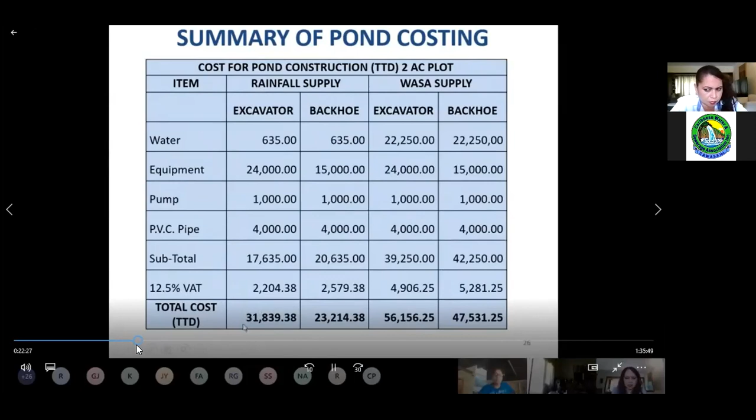So the $31,000 is the figure we are most interested in for pond incentives, because this is where you are using a rain-fed source and an excavator. That's the total for a pond on a 2-acre plot.

Equipment costs now, these are just rates if the farmer has to be renting equipment. We look at approximate rates per hour or per day. We have it per hour for the excavator, for a backhoe loader, and a roller compactor, because the compactor is necessary for the embankment, compacting the embankment, the side slopes, and the base of the pond. We also have a cost for a crane, a crawler tractor, a dump truck, and a road grader.

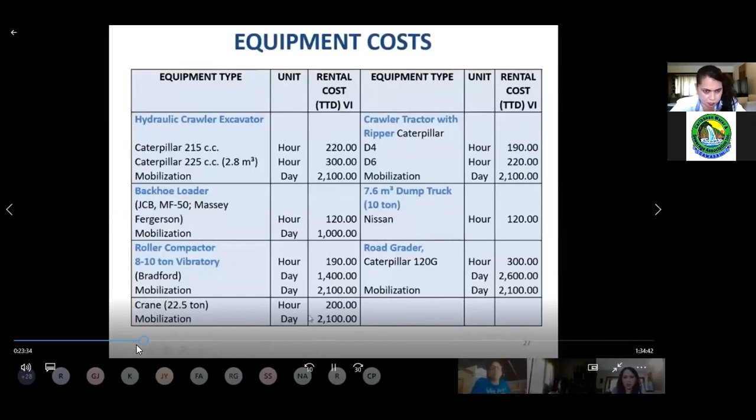So for each of these equipment costs, there's a mobilization cost, which takes up a high figure of 2,000 for the excavator. $2,100 is the mobilization cost per day. These are the figures you look at when estimating rates for rental of equipment.

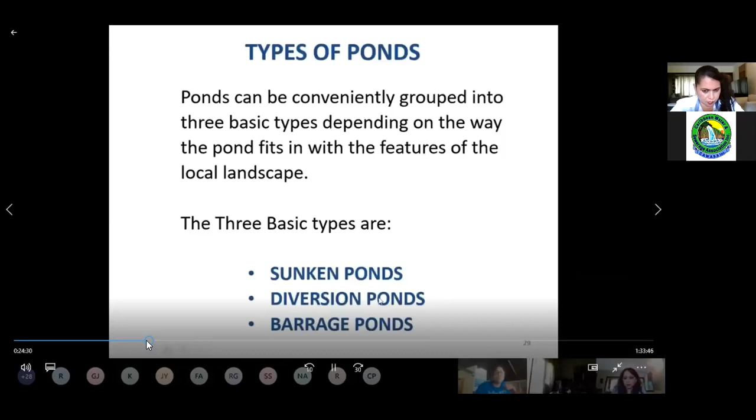Now we reach Module 4, design criteria for ponds for drainage and irrigation. We look at the types of ponds before we look into the criteria for design. There are three basic types of ponds: sunken, diversion, and barrage ponds. We don't really consider barrage ponds in Trinidad because it's not feasible for the agriculture sector. So we'd be looking basically at the diversion pond first, this is what is used in Trinidad, and in some cases sunken ponds, because sunken ponds are where you have them in valleys and so on. So we look at the other two, diversion and sunken ponds.

The factors to consider for locating ponds: the main factors are the topography and the proximity to the water source. When I say topography, it means whether the land is flat or undulating, and it's highly recommended that ponds be dug on flat lands preferably. But we allow slopes of at least 0.5% grade to 3% grade. For instance, grade meaning the vertical to horizontal ratio would be like 1 to 2, so 1 vertical, 2 horizontal. These are the recommended grades if a flat surface isn't available.

Proximity to water source, it should be close enough to rivers and channels, but there is a limit, because ponds should not be built too close to river embankments. I'll give you those quantities later on, the limits that must not be exceeded for proximity to other channels. The soil type is another factor to consider; we have particular soil types needed for pond construction.

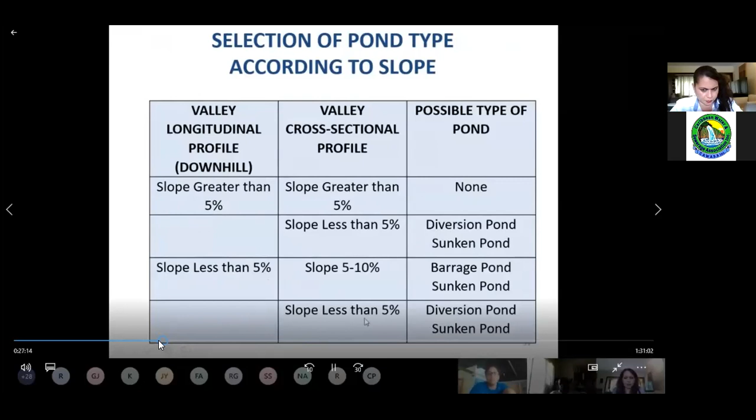These are definitions of what the sunken pond is. They are usually at levels below the level of the surrounding land. So as I said, it is found in valleys and so on. And they are directly fed by groundwater, rainfall, or surface runoff.

It is built either as a dugout pond because it is in an existing hollow, so it already exists in a hollow. It just has to be excavated and dug out to increase the dimensions of the pond in this case.

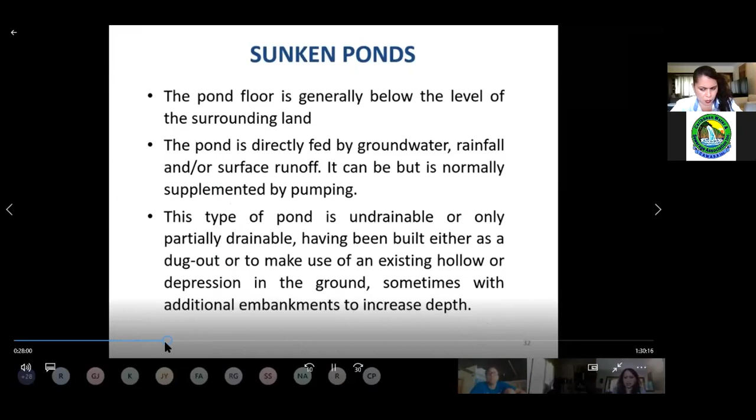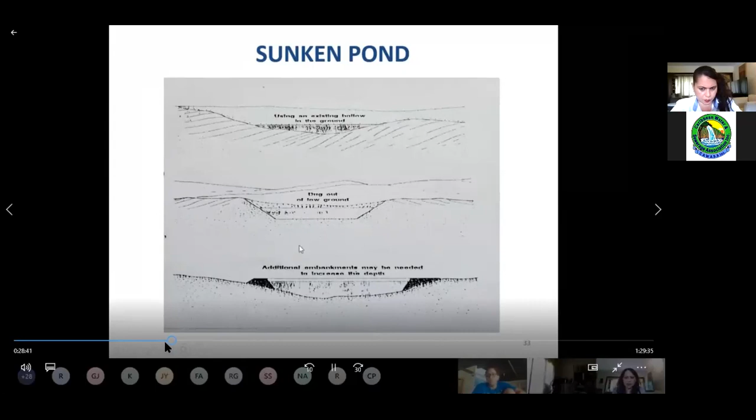So this is a type of pond built for irrigation purposes. The diversion pond is what we recommend basically for flat land. This pond is fed indirectly by gravity or by pumping through a diversion canal, so it could be fed from spring water, underground water, or river channels.

And it is done on flat ground, where you have to build 4 embankments so that there will be no overflow when the pond is full. The embankment will also protect the pond if there is flooding in the area, so it is a double purpose: it protects the water from flooding, and it protects against overflow of water from the pond onto the land.

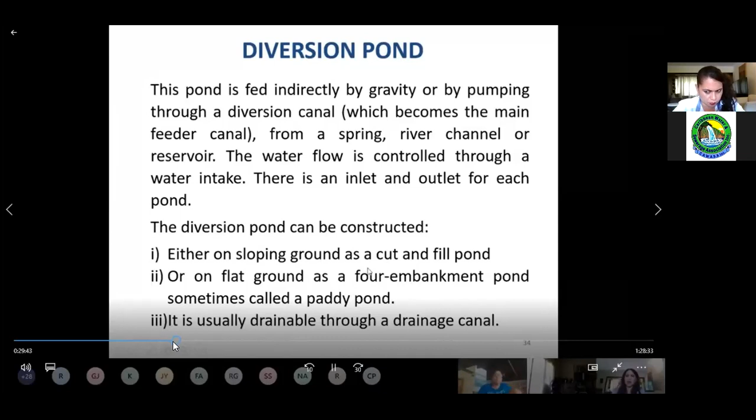It is also fed by a pump, where the pump might be used to lift water from another water source, by a nearby river, and the pump lifts the water and uses it to fill the pond in this case.

These are advantages and disadvantages of the diversion and sunken pond. We look at basically differences in cost, the way the ponds are shaped, and so on. There's no need for embankments with the sunken pond because it is already in a depression, so this is an advantage; you don't need to build up the embankments as often as you would have for a diversion pond. These are the basic advantages and disadvantages of the 2 types of pond I just described.

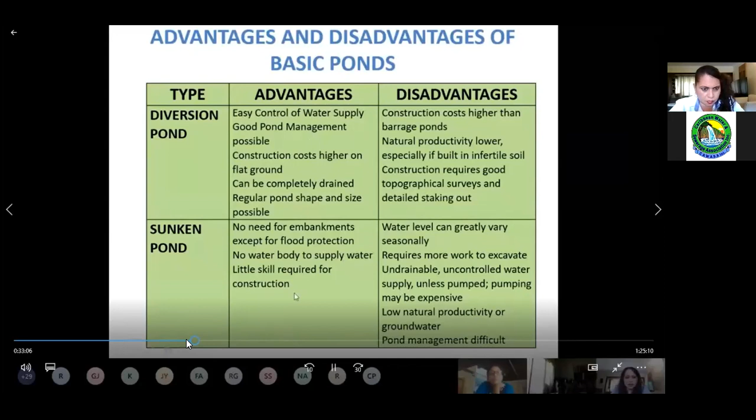Module 5 now, the criteria for pond site selection. I spoke a bit about the pond site being near to the source of water, away from roadsides, and not too near to river channels or utilities. So pond sites must be selected for the most efficient and economic operation on farms with the following criteria: maximum surface runoff to be captured for storage without significant collection of silt and debris.

So we consider surface runoff, then minimum operational costs needed in pumping. The operational costs using pumps, we try not to have pumps as that will increase the cost for filling the pond with water. So we recommend preferably rain-fed ponds, but if it is necessary, we use pumps to get access to water from rivers and so on. Minimal costs are needed also in earthworks required.

So the less amount of earthworks required, you get less capital costs, with a minimum amount of drainage channels needed within the plot. You try to locate the pond near to where the crop is being cultivated, so you don't have as many lengths of pipes for irrigation purposes. You would have less amount of pipes needed for irrigation if the pond is located near to the crop being cultivated.

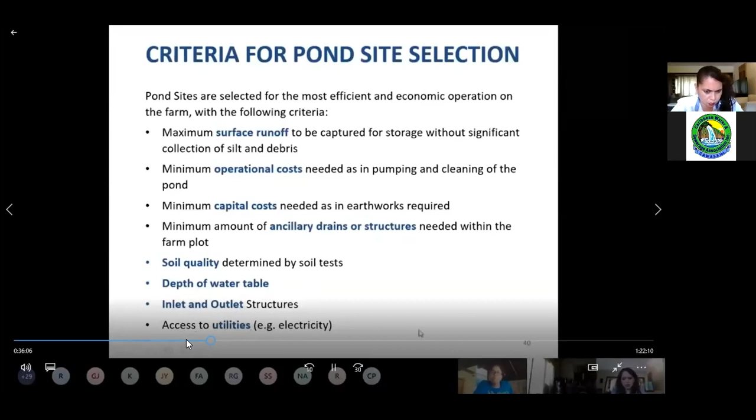Inlet and outlet structures, I described about that a little earlier. And access to utilities, I also described that earlier. We have infrastructure systems for this site.

As I spoke about the pumps and so on, you'll have a pumping system, as seen in the picture, that will fill the pond. And there are various capacities of pumps.

There are farm reservoirs or communal storage ponds. These could be located on sites in close vicinity of the projects, so you'll have multiple stakeholders getting access to the water from a communal storage pond. This is another type of pond where it's not for the individual farmer, it is used collectively by farmers. In those cases, farmers can do joint abstraction of license for water, and there are many locations in Trinidad where farmers do this type of water storage by communal ponds.

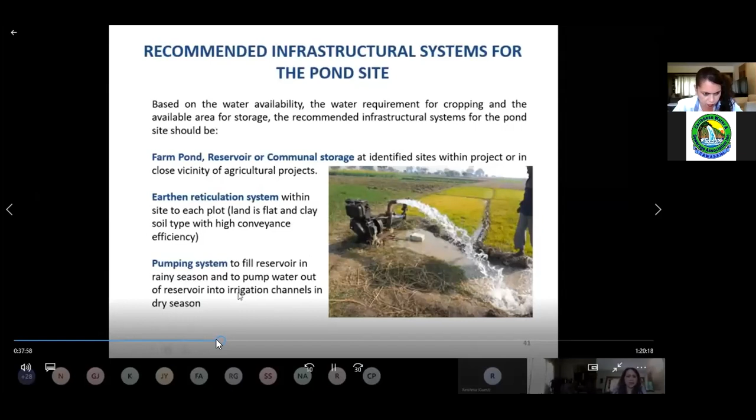Earthen reticulation system within the site, where the land is flat, clay soil type, with high conveyance efficiency. This is the earthen pond as I described, the basic diversion pond, and it is an earthen pond. Some people line the ponds, but we mostly just do earthen ponds in Trinidad, because the clay content is sufficient - at least 20% clay content is what we recommend for the earthen type of pond. These are just a few.

Six, we have criteria now for design and associated pond structures. So we have efficient water control and distribution from the pond storage structure.

So design of the pond for irrigation involves the design and assessment of the following: water availability, irrigation water requirement - this is a vital aspect of the calculation of the pond design - the irrigation water requirement, which is based on cropping pattern and irrigation method.

The design intake and conveyance canal, whether it's a pipe system or via canals which have been constructed on the surface.

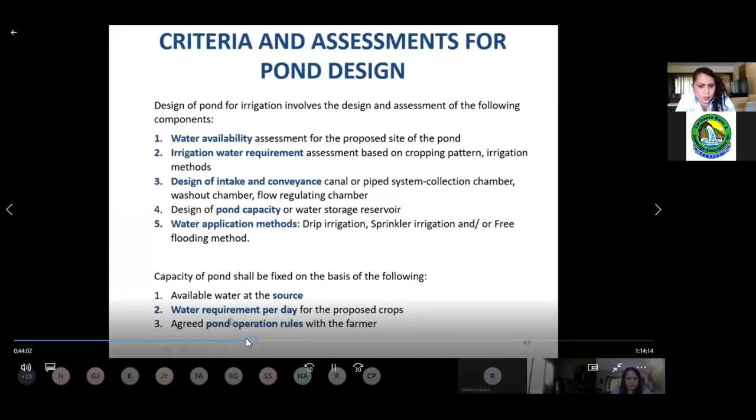Then the design of pond capacity of the water storage reservoir, that is a criteria for the design of the pond - you need to determine the capacity that is required to hold. The application methods, such as drip irrigation, sprinkler, and the surface water or free flooding method. Capacity of the pond shall be fixed on the basis of the source, water requirement, and pond operation rules. This is just summarizing what is said above.

Recommendations for embankment construction: mostly the soil type is what is important. The height of the embankment refers to the height after settlement and compaction by a bulldozer, and whether it should be used for vehicular traffic, because sometimes if the top of the embankment is wide enough, there's use for vehicular access where it is a wide embankment.

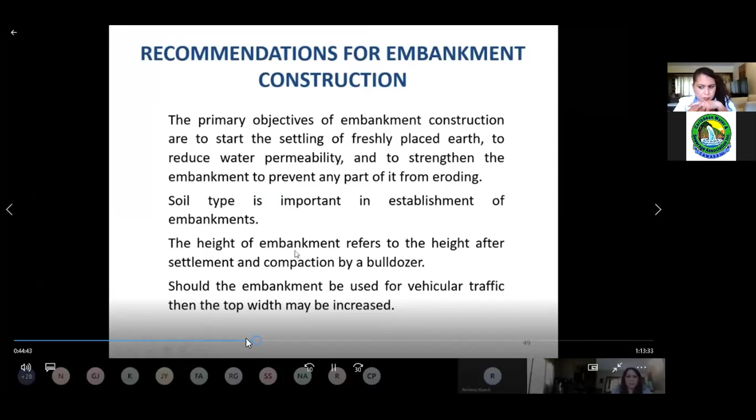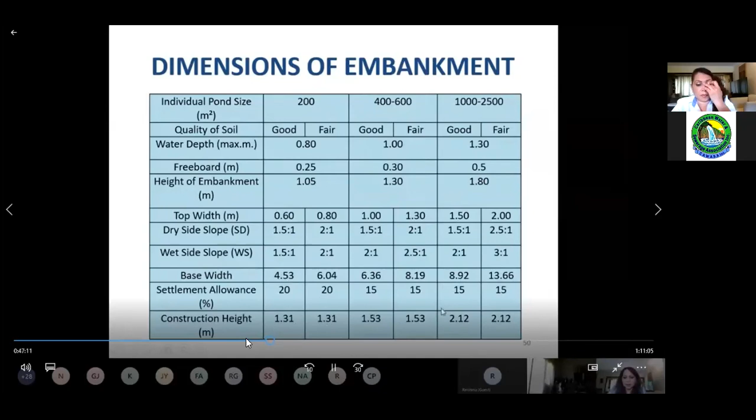The side slopes: steeper slopes are more easily eroded, so slopes should be more gentle for soils that contain more sand. As the slopes increase, erosion increases, and as the size of the pond increases, there are more waves in the water due to wind. So as the pond size is larger, waves can cause erosion of the embankment slopes.

A higher slope ratio makes it easier to use bulldozers because it is less steep. As I said, 3 to 1 means shallow, since it's 3 horizontal to 1 vertical, so the embankment is shallow and you get a more shallow pond. This gives easier access to the base of the pond for bulldozers building the embankment. The shallower the pond, the more you can use a bulldozer; the steeper the pond, the more you need an excavator for longer reach.

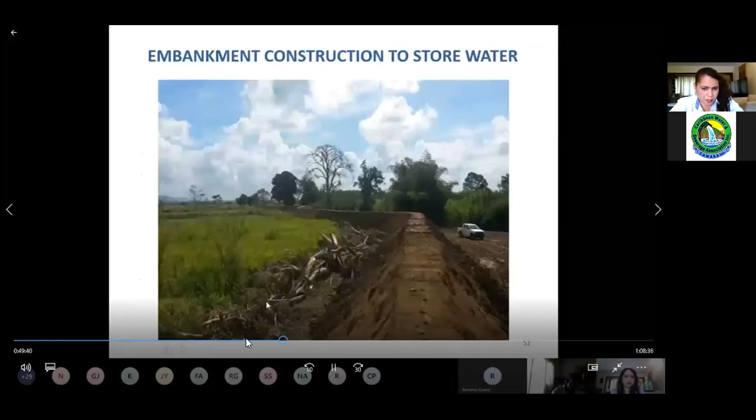For pond inlet structures, we usually recommend a PVC pipe 10 centimeters in diameter, or up to 12 centimeters, even up to a foot in diameter. Inlets can also be made using shallow trenches. Another option is an inlet via a sluice gate, but we will not consider that in this training, since sluice gates are used for very large communal ponds.

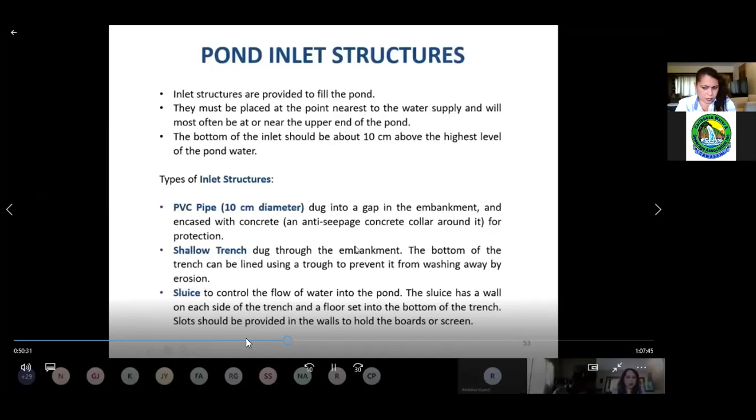For overflow pipe construction, we try to locate the overflow pipe at the corner of the pond, where it exits into a channel built at the side, an intermediate channel connecting to an outlet source like a river. This overflow pipe, sometimes called a spillway, is built through the embankment, positioned about 15 to 20 centimeters below the highest water level in the pond.

As shown in this second diagram, the end of the outflow pipe is 15 to 20 centimeters below the surface level of the pond. It must be tilted at that angle so that when the pond overflows, the water passes through the pipe and exits at the outer embankment, where gravel, stones, or boulders are placed to prevent erosion.

Boulders are placed so that when water exits the pipe it does not erode the embankment, filling a small catchment that leads into another channel to the river or outlet source. The pipe is fixed in the upper part of the embankment as shown, and it must be long enough that the overflowing end discharges excess water beyond the toe, the base, of the embankment.

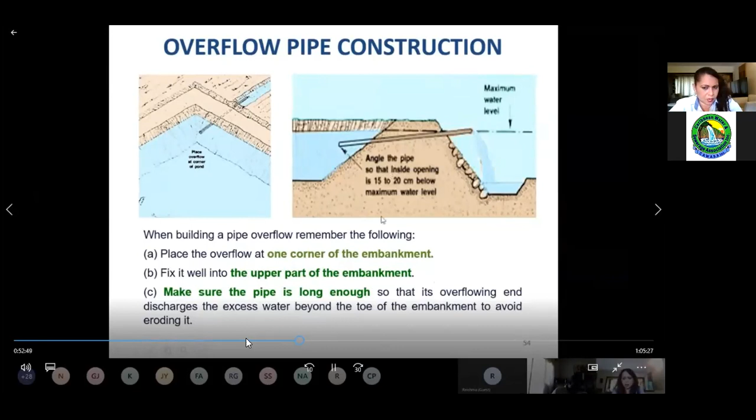The overflow pipe is usually 12 inches in diameter. It can be secured with cement casing, as shown in this diagram, where concrete is poured around the pipe, forming a concrete bracket that prevents the pipe from shifting within the embankment.

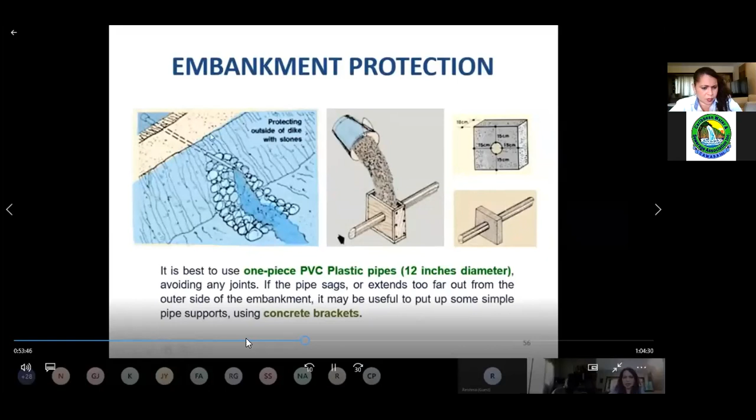This casing is built prior to constructing the embankment. You build it and have it in place, then afterwards fill the embankment in layers and compact it.

So the pipe would be angled slightly, and the protected concrete area is built around the pipe to secure the movement of the pipe.

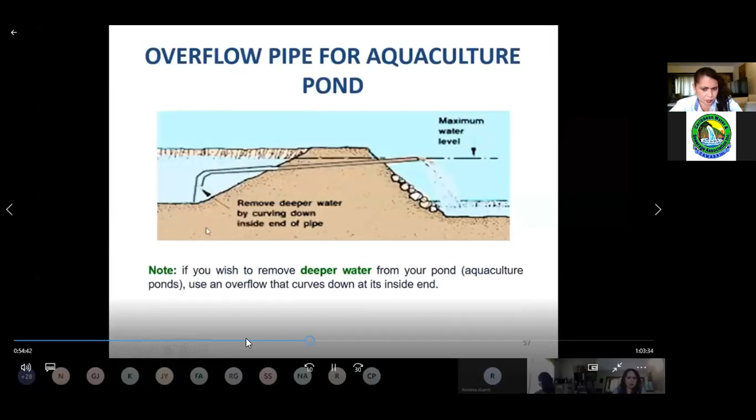This is another outlet pipe which is bent, curving down on the inside. We use this type where it's bent downwards in aquaculture ponds where fish are stored, in order to prevent fish from going into the pipe. It's usually blocked at the end with a screen to prevent fish from entering. This is only in the case of aquaculture ponds where fish are stored.

These are the sizes of outlet pipes. We have for various pond sizes, from less than 100 square meters right up to more than 5,000 square meters, various pipe diameters that are recommended. These are important figures to note when constructing the outlets for the ponds.

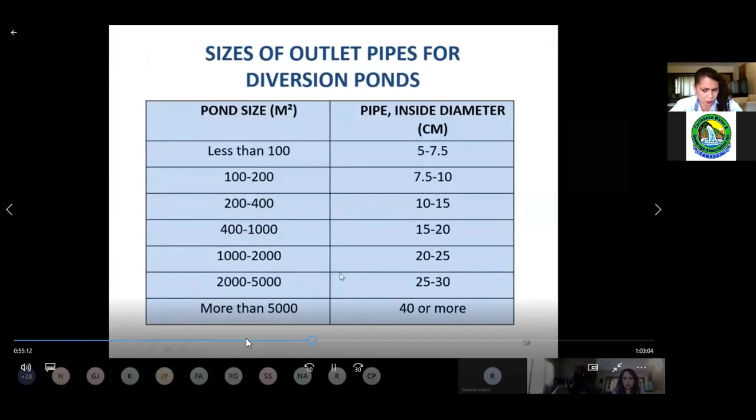The discharge capacity of the overflow pipes, we also take into consideration. For various diameter pipes, there's a discharge capacity. This is important because when the Water Resource Agency has to inspect the pond to recommend a water abstraction license, they need to determine the water discharge capacity. In many cases, the discharge capacity for certain ponds may be 1,000 meters cube per hour.

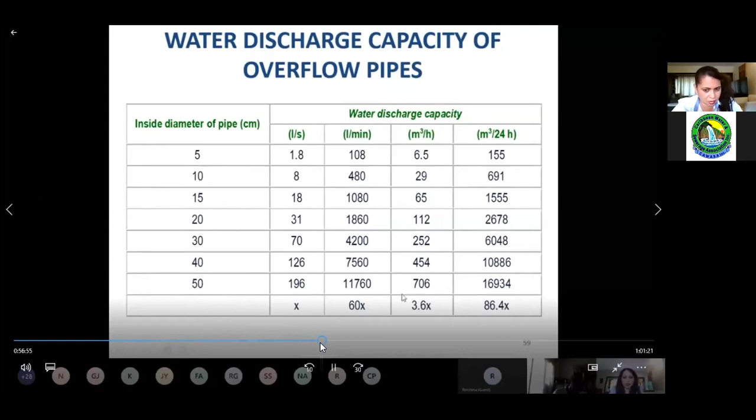Module 7, we look at the theory behind the construction of the pond now, how we calculate it.

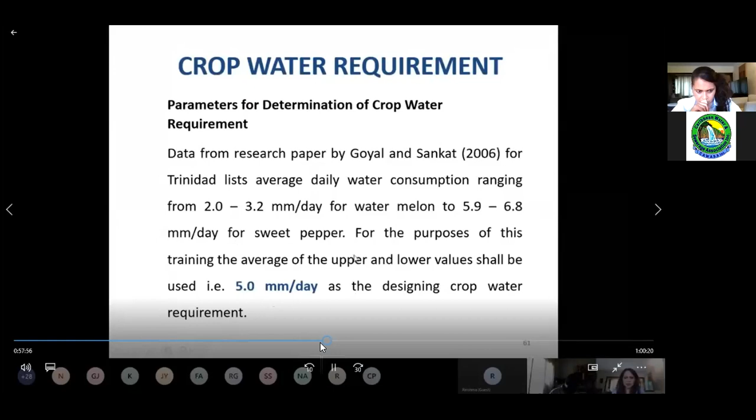We start off with the crop water requirement. This is the main aspect of pond construction, where we use an average daily water consumption of 2 to 3 millimeters per day for some crops such as watermelon, and for other crops like sweet pepper, we use 5.9 to 6.8 millimeters per day. In this design calculation, I will be giving you the average figure of the daily water consumption, which we will use as 5 millimeters per day. So the crop water requirement design amount is 5 millimeters in this case, which I'll be showing you now.

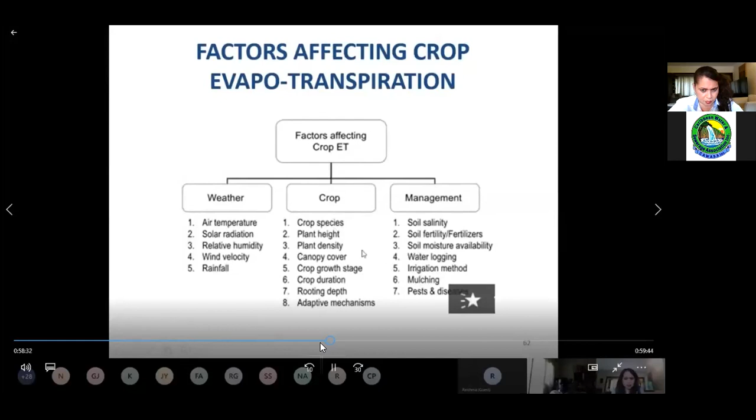The crop water requirement is dependent on these factors affecting evapotranspiration in crops: weather, crops, and management. These are just some meteorological and climate associated aspects of the crop water requirement which we look into, and all these affect crop water requirements. Major factors influencing crop water requirement or crop needs for irrigation are sunshine, humidity, temperature, wind speed, type of crop, growth stage, and soil type.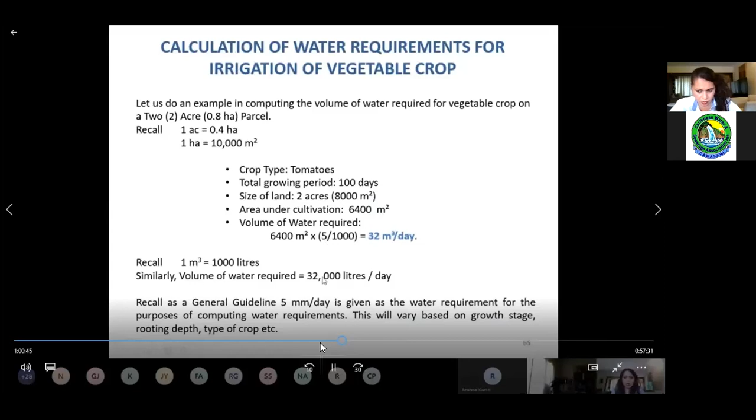The volume of water would be calculated as 6,400 times 0.005 or 5 over 1,000, which will give 32 meter cubes per day. This is how the initial water requirement is calculated.

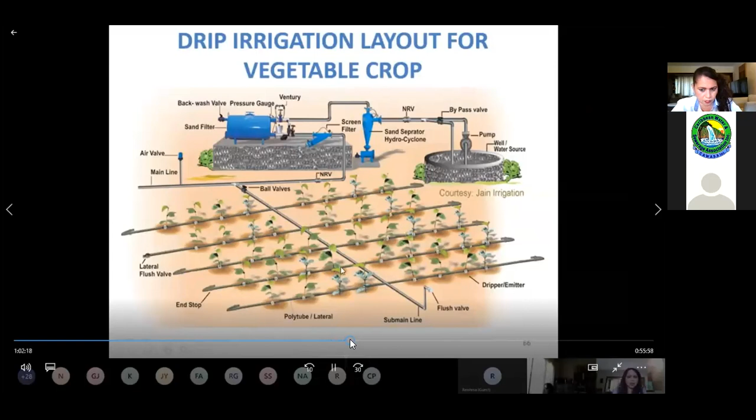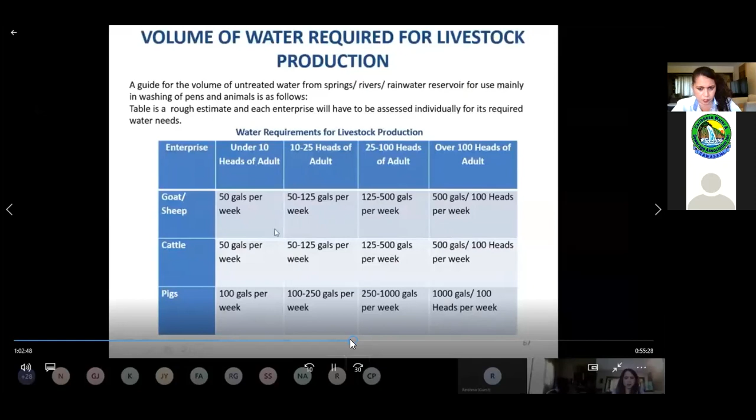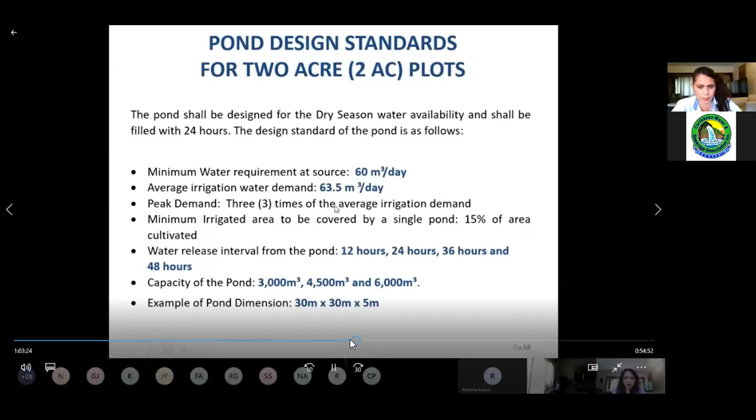The 63.5, given as the irrigation requirement per day, we start with the crop water requirement of 5 millimeters per day, and we know the effective area to be irrigated is 80% of the acreage of the land. So this is where I calculated 85% of the 0.8 hectares, and that came up to 6,475.

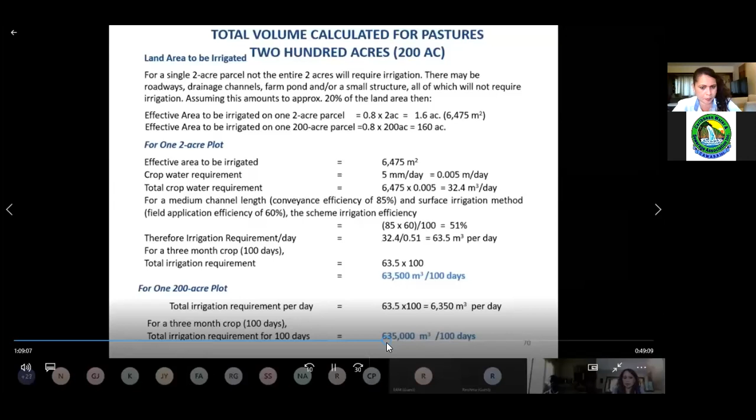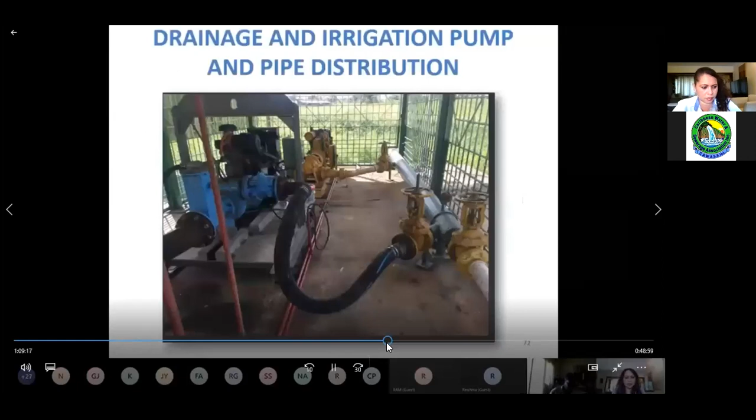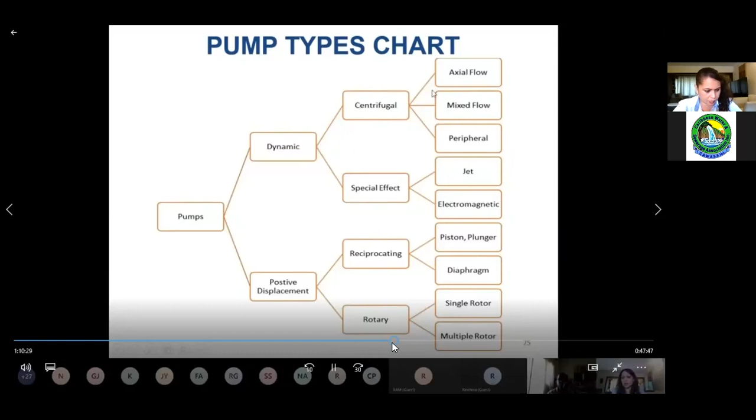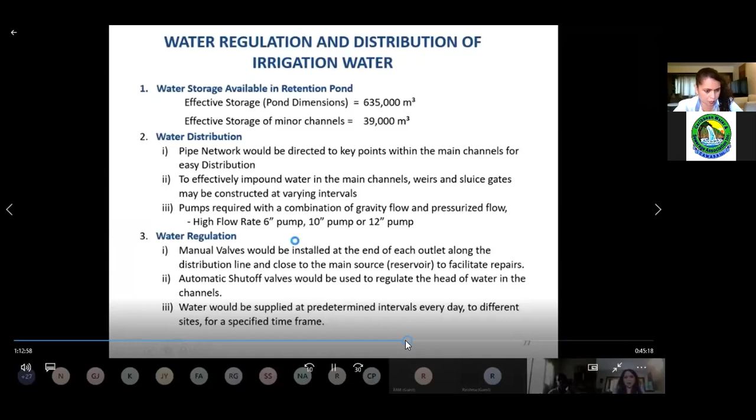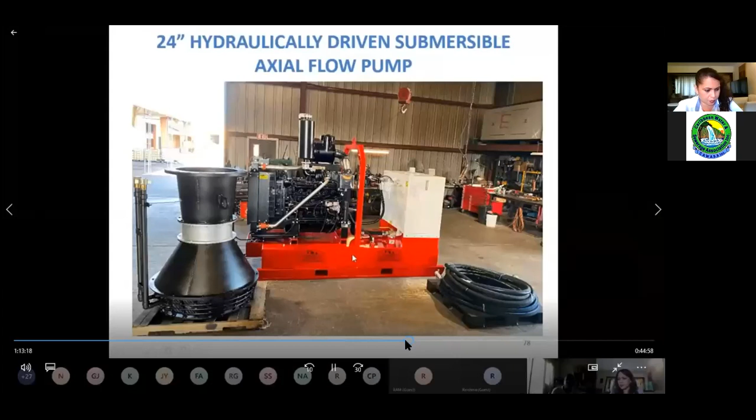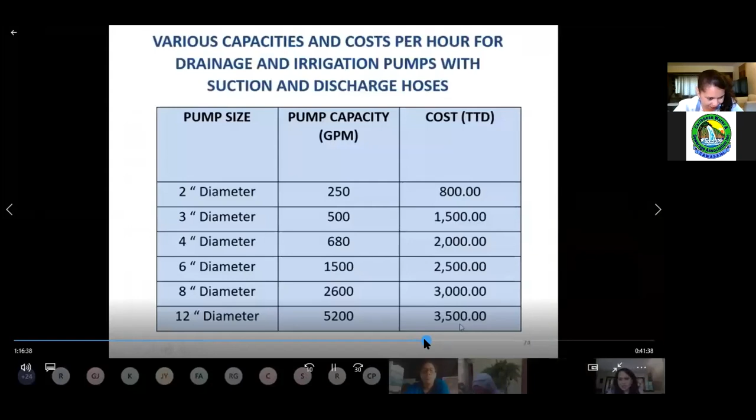Procedures. So this is the practical aspect of pond construction, how the ponds are built.

I saw some questions in the chat box about the material used for the embankment. Mr. Chedi asked about the embankment. I explained the material is in situ material, right, in one of the modules.

On design construction procedure, right? So we have 5 basic steps. First, remove the vegetative surface. Second, we demarcate by wooden pickets. Thirdly, you mark and cut the depth of the pickets so the operator can be guided accordingly, marking the depth to which it must be excavated.

Excavate material to the depth by placing material around the perimeter to form an embankment. And you compact the embankment in layers of 150 millimeters thickness - those are the heights of each layer. You use a plate compactor to compact the side slopes, and excavator tracks are used for compacting the soil at the bed level and embankments.

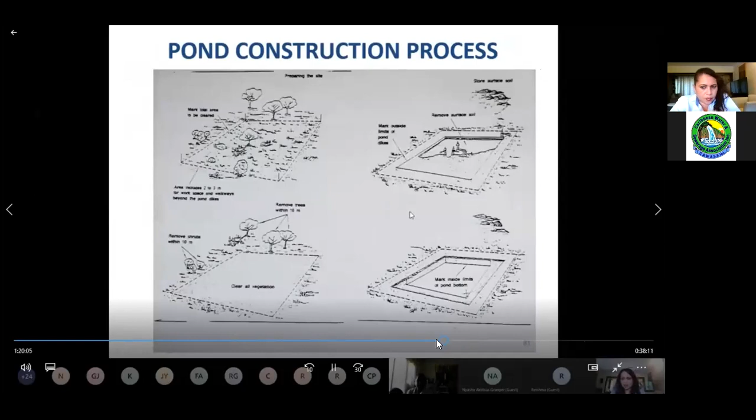These are the pond construction process stages. You have the first one with the vegetation covering the land. Then you strip the vegetation in the second one. Then the third one, you start the excavation at various stages - this is just one of the stages of excavation. And the final one, you have the completely formed pond.

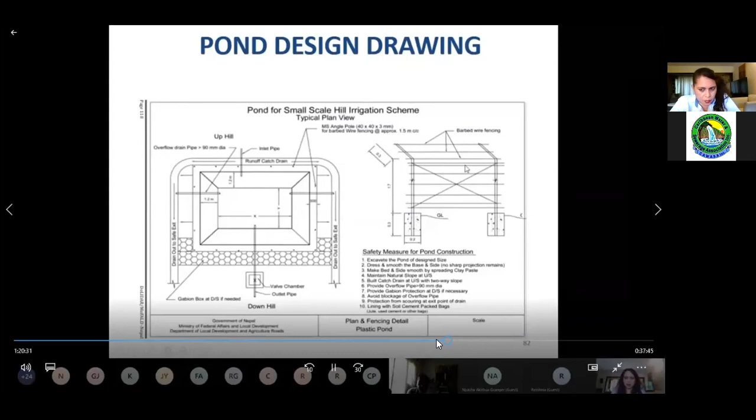This is just a design drawing of a top view of a pond that is constructed. We also have a diagram here of the fencing, which is recommended for protecting the perimeter of the pond so that no animals or any human may enter that area, because it's a health and safety provision.

This is the process of pond construction. The process for new farm ponds - they must be constructed in accordance with specs, drawings, and dimensions on bills of quantities given by the engineer or the contractor, if it is the case of a private pond where the contractor builds the pond for the farmer.

The critical dimensions are the proposed pond dimension, depth, side slopes, and spillway width or overflow diameter. The construction of the ponds are fixed price lump bid items, and the ponds are sited based on maximization of water collection from surface runoff so as to satisfy irrigation demands and minimize operational costs via pumping and cleaning of the ponds and interceptor channels directing water to the pond. The engineer must approve each pond in terms of siting, layout, and applicable design prior to commencement of construction.

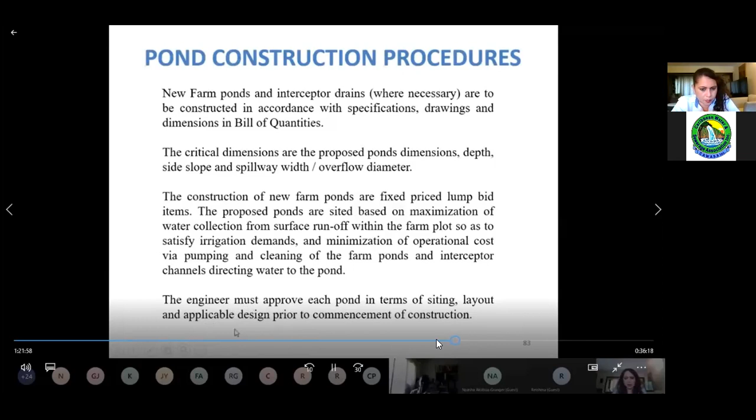So in this case, we will have the officers from the county offices. They will be able to go and inspect these sites and determine the best layout and design prior to commencement, after the training.

These are actual photos taken of the steps in pond construction. The first step is pond siting and land clearing. This is the first picture, where you have vegetation covering the site. The excavator will then come in and remove the vegetation.

This is an excavator in the background, and this is one of the operators. This is the cleared site, where you'd see the raw soil material, the subgrade - this is the raw earthen soil here.

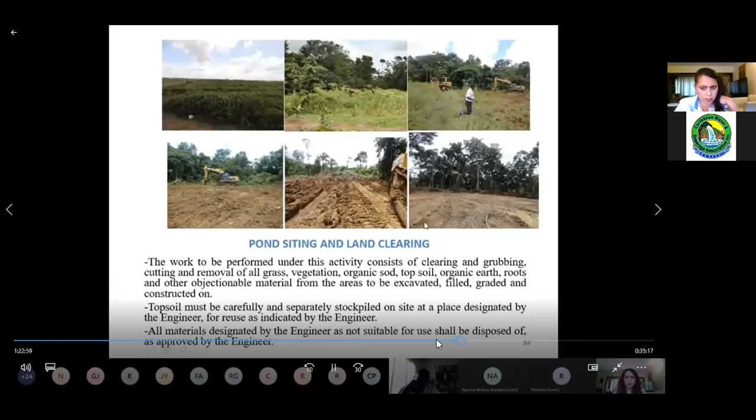So this is how it looks after site clearing. Then you have these stakes staking out the perimeter. You have the site officers here working out the area for the pond, the best location. It must be on flat land, not too near to the roadway or to channels. They locate the best location, and then they start staking out with stakes - these are the stakes here at the end, in the last picture.

Following that, the excavator comes and digs the trench around the perimeter of the pond. The excavator then removes all the soil from within that perimeter until it looks like this.

That same in situ material will then be used for constructing the embankment on the perimeter. The side slopes are dug according to specs, and the base of the pond must also be excavated to the required depth and compacted, so there will be less seepage of water. You get less infiltration when the soil is properly compacted, and less erosion on the slopes when they are properly compacted.

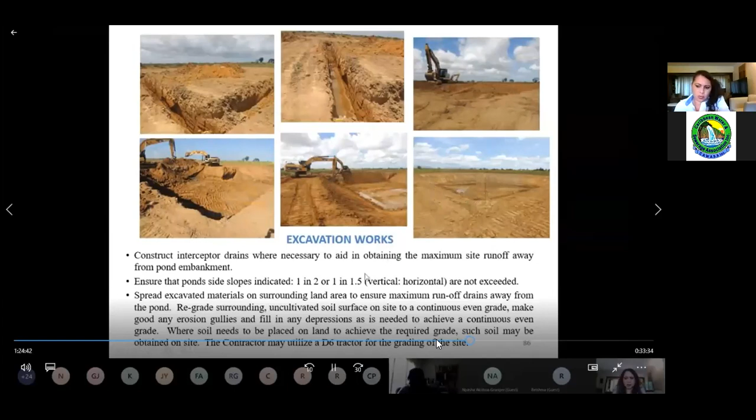From this stage, in some cases the excavator has to go to a deeper level. The pond is done deeper with a second, smaller area within the outer one. In those cases, you get a second slope being made - that is where a deeper pond is required.

We try to keep the slopes constant, because if we had to go deeper, the slope would have had to be steeper. So we do a smaller area of pond within the larger area, so the slope remains consistent at 1 in 2, and is not a steep slope. The smaller pond within the bigger pond allows more water storage by going deeper into the ground.

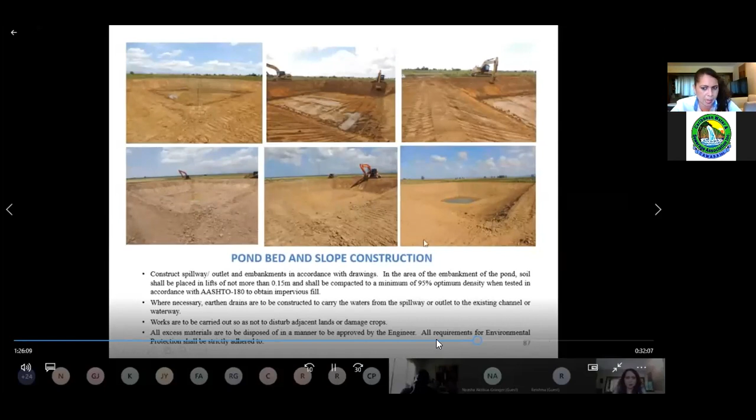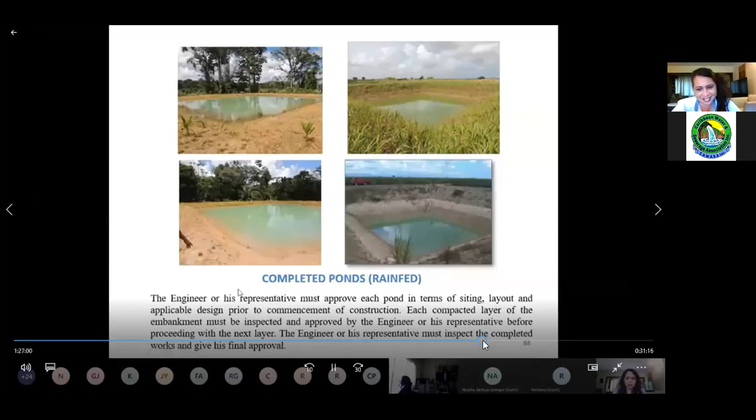So we have the final completed ponds, preferably rain-fed, and those are the actual photos taken of ponds dug by the ministry.

So disposal of the excavated material is very important. The work consists of removing and piling the topsoil, excavation and disposal of material necessary for construction and rehabilitation of the farm pond, and grading of the site to required elevations. Where filling is required, this work also includes initial removal of unsuitable material, excavation, and grading of necessary channels or ditches in the construction of the pond.

The excavated material becomes the property of the owner, and is disposed of by permission of the owner, or as directed by the engineer, in the following ways: the excavated material could be fill material, fill surcharge, topsoil, waste to an approved dump, and other uses.

The excavated material, other than waste to the approved dump, shall not be removed from the site without written permission from the engineer, or in the case of private land, from the owner.

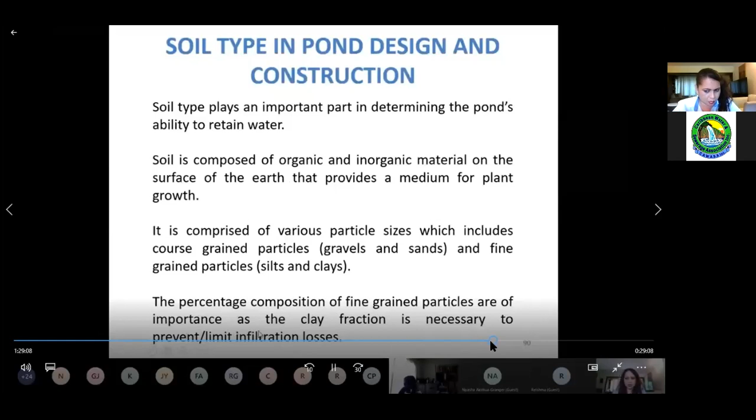Soil type in pond design and construction plays an important part in determining the ability to retain water. Soil is composed of organic and inorganic material and provides a medium for plant growth. It has various particle sizes like gravel, sand, silt, and clay, and the percentage composition determines the suitability for pond construction - the clay fraction is what is necessary to prevent infiltration loss.

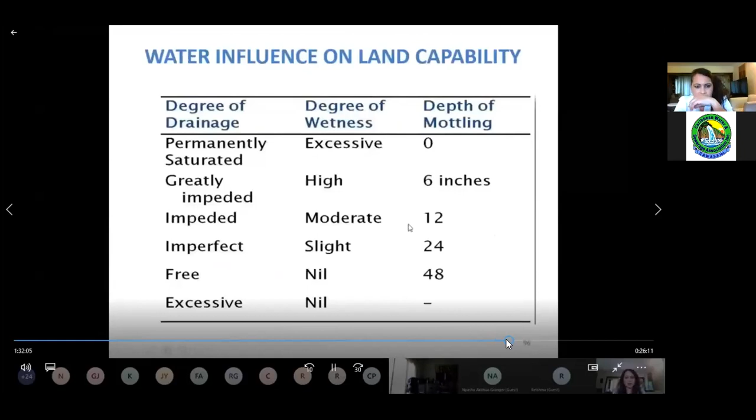So these are some factors we can look into. Soil type determination, as I said, we determine the soil type from soil labs. The soil lab does the testing, and the type of test done is a sedimentation analysis test.

We mix the sample with distilled water and add a dispersing agent of sodium hexametaphosphate and shake it to allow it to settle. The time is recorded after 24 hours, and we can then determine the percent of sand, silt, and clay. So the sedimentation analysis test done in a soil lab gives us the percentage of sand, silt, and clay.

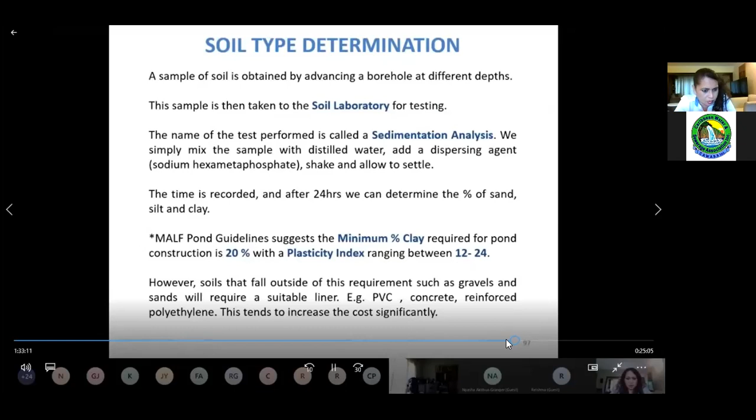We recommend 20% clay, and the plasticity index would range from 12 to 24 for recommended ponds. Right, so that is the soil lab test.

We can also look at this chart, which is a soil texture class, and we can determine from the sedimentation test what percentage of sand, silt, and clay where the soil texture lies. For instance, we want 20% clay. So if we have 20% clay, which is here, the recommended soil we would look for is if we get a sandy clay loam, or we try to get anything with at least 20% clay or more.

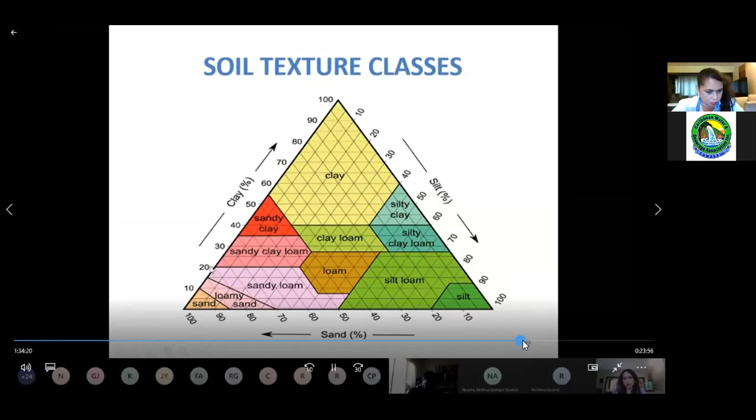They would be recommended for pond construction. But of course, if we have these slopes, we can also look at those other types.

The more gentle slopes would allow for a clay loam, would allow for the sandy clay, because 3:1 meaning horizontal to vertical. So that will be a gentle slope, not a steep slope.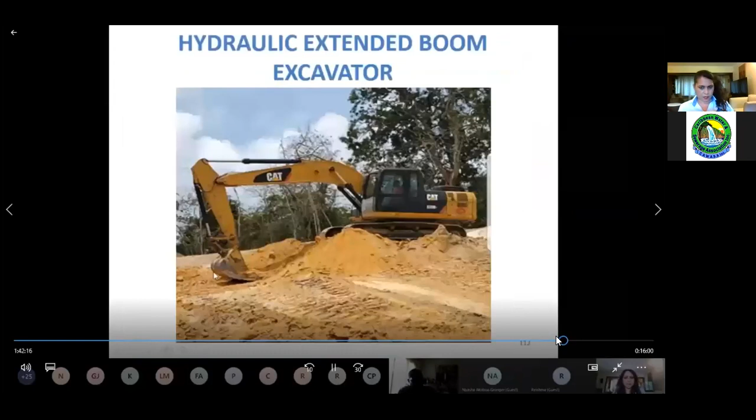Module 10: limitations of pond construction. This is some things that we observe over the years that happen when ponds are being dug. These are not recommended things in these limitations, so I'll go through it quickly.

It is illegal to block existing dams or existing water channels with dams or blockages to store water, as this will prevent regions downstream from accessing water.

It is not advisable to build ponds in waterways along hillsides, as it is where runoff occurs and will cause erosion of the embankment. Ponds are not to be built on river reserves that fall within 15 meters of the riverbank. So we avoid going within 15 meters of the riverbank.

And ponds are not to be built near roadways, that's not within 10 meters of the road edge, or utilities or houses or farm structures, as this could cause erosion of the roadsides and cause water to seep underground and damage the road and the foundation of buildings and structures.

It is illegal to build ponds in valleys and depressions because these exist along water courses. And it is illegal to fill ponds by abstraction of river water without obtaining the abstraction license from Water Resources Agency.

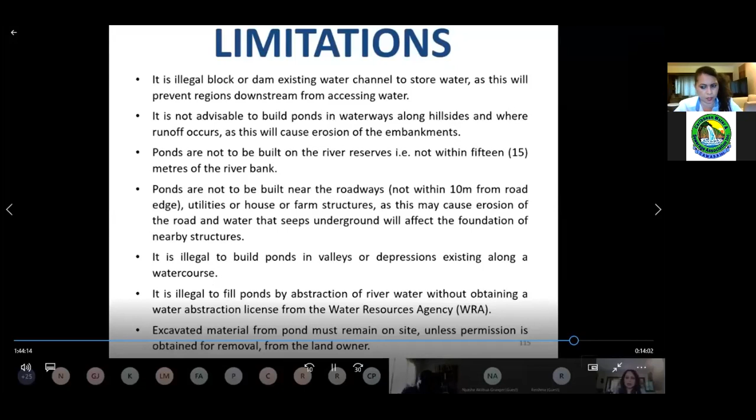Excavated material from the pond must remain on site unless permission is given for removal. If it is private land, the owner must give written approval, and if it is state lands, the engineer must give written approval for any removal of the land.

For module 11, we look at the abstraction application process. The process for abstraction of water from rivers is by applying at Water Resource, a branch of WASA. The form LS1 must be completed, along with a payment of $150 plus VAT for the administrative fee.

The submission of a map of the site must be submitted, showing the proposed point of abstraction in the river channel.

A completed survey and hydrological assessment is done by the regulatory licensing unit at WRA. Then a water quality analysis of the surface water is done as well.

The schematic diagram of the proposed structure for diverting water from the river must be shown on a diagram submitted to WRA. The application to abstract a water source would then be approved once all these conditions are met, and an index file is assigned to that farmer, along with a license number. This is a sample of what they look like.

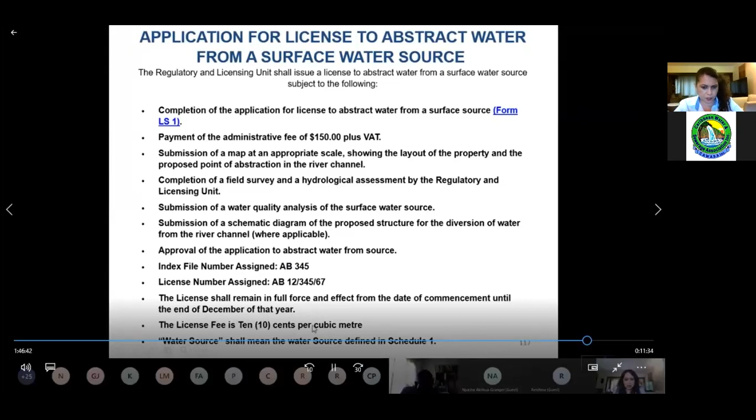The license fee is usually 10 cents per cubic meter, as stated before, and the source shall mean the water source defined in Schedule 1. This is Schedule 1, which describes the source of water. The source in this case would be a river.

Then the location, you state whatever food crop project is the location of the source. The interest of the licensee is a lease, because you're asking for a lease for abstraction of water, and the purpose of abstraction is irrigation of crops. The means of abstraction is a pump, which is the equipment used, with a capacity of 400 cubic meters per hour.

The method of measuring the quantities abstracted was done by estimation through a field assessment. The license rate per month is approximately 20,000 cubic meters per month, for instance.

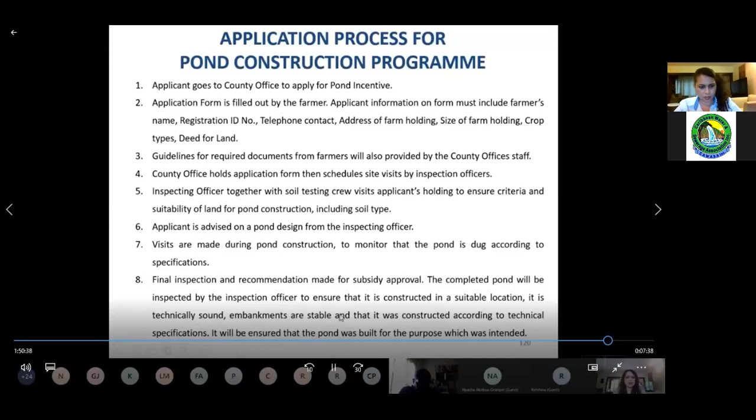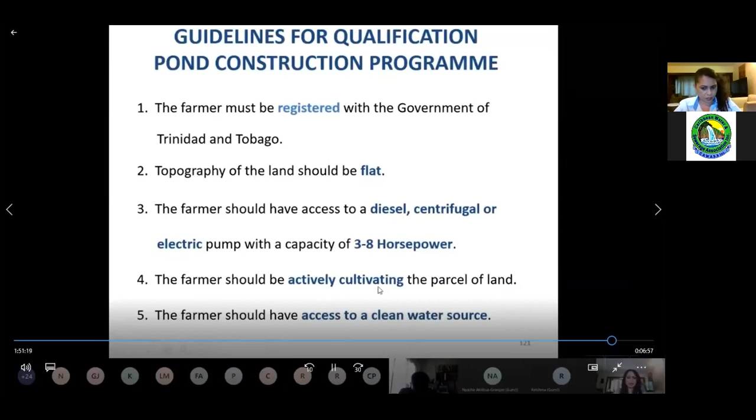The farmer should be actively cultivating the land, and finally the farmer should have access to clean water sources.

Module 13: we have recommendations for reduction of risk of contaminated water.

Especially during COVID times, we have to take special consideration of water quality because there are risks with pathogens that may be in water. Pathogens could be transferred to land and crops by contaminated irrigation water, which represents a significant challenge to processors, producers, and consumers, since there is an established link between irrigation containing pathogens and increased frequency of pathogens on produce, which leads to disease in humans.

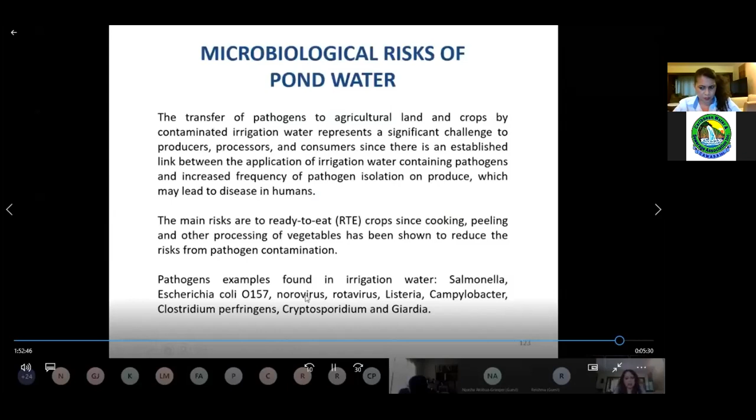Examples of some of these pathogens in irrigation water include Salmonella, E. coli, rotavirus, norovirus, Cryptosporidium, Giardia, Clostridium perfringens, and now we can even speculate that COVID-19 might be a pathogen we have to be careful about.

Recommendations for reduction of risk: we have to consider providing guidance to growers, for example with risk assessments, monitoring, and testing the water quality of irrigation water. We can also provide educational material. So these are some recommendations we can have for water quality.

You get a lot of pollution of water in the Caroni River due to effluent caused by pollution from industrial waste, municipal waste, and agricultural waste like pesticides and agrochemicals that pollute the water, and that is detrimental for food security because it will cause disease, cancer, and so on.

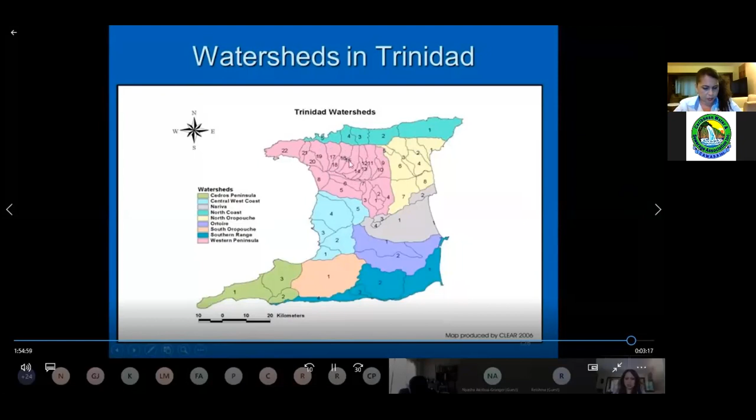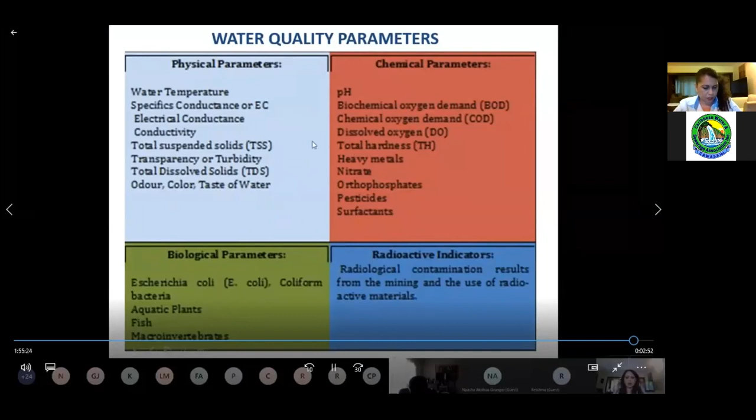These are some parameters of water quality: physical, chemical, biological, and radioactive. We look mostly at the physical parameters for pond construction. For chemical and biological parameters, when considering water quality, we try to avoid certain amounts of chemicals as shown here.